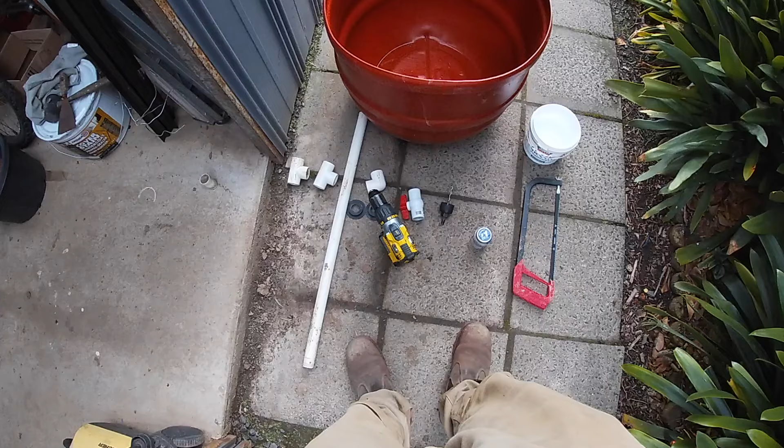To create this filter, all you'll need is a good watertight container. Here I'm using half an old olive barrel. Those of you that follow my channel will know these barrels make many appearances. That's because they're cheap, strong, food safe, UV stabilized and easy to find on Marketplace, eBay, those sorts of sites.

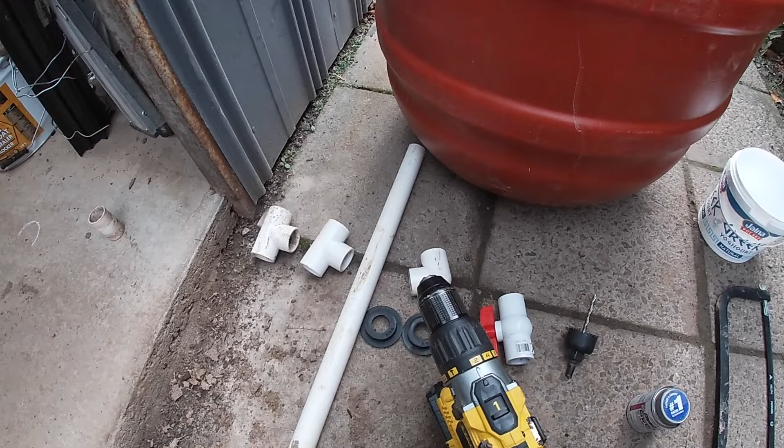For the plumbing, I'll be using 2 T-piece fittings, 2 uni seals, some PVC pressure pipe, a couple of elbow fittings, 1 ball valve to provide an easy way to flush out the filter. The size of the plumbing fittings will be determined by the size of the pump you are using. For this quick setup, I'll be using a pump capable of delivering 1,000 litres per hour. Therefore, I'm using 25mm or 1-inch plumbing fittings.

You'll probably find that you'll need other fittings to create a more aesthetically pleasing filter. I'm just quickly knocking this one up to show you guys, and this is all I'm going to need to make it functional. So for the tools, you'll need a drill and a hole saw to create holes for the uni seals. For these 25mm uni seals, I'm using a 44mm hole saw.

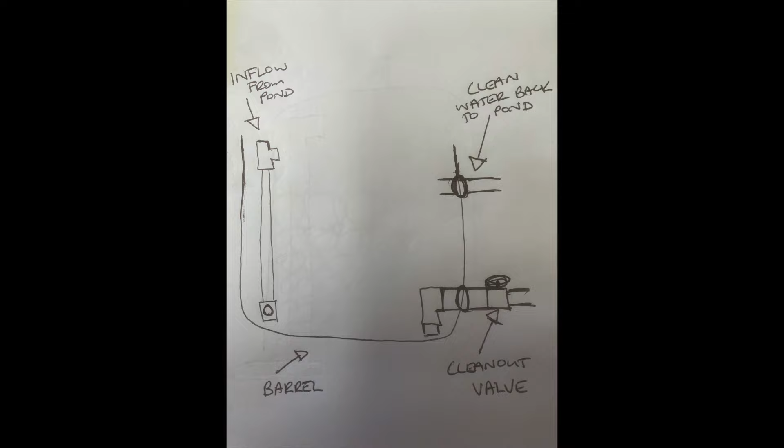The inflow from the pump can come over the barrel as it's being pumped in. Both the outflow and the clean out are using gravity, hence the need for a watertight seal. Of course, if you wanted to make it easier to conceal the inflow piping, you could add a 3rd uni seal. I find it unnecessary, as once I add the rocks and gravel, the inflow pipe is quite hidden.

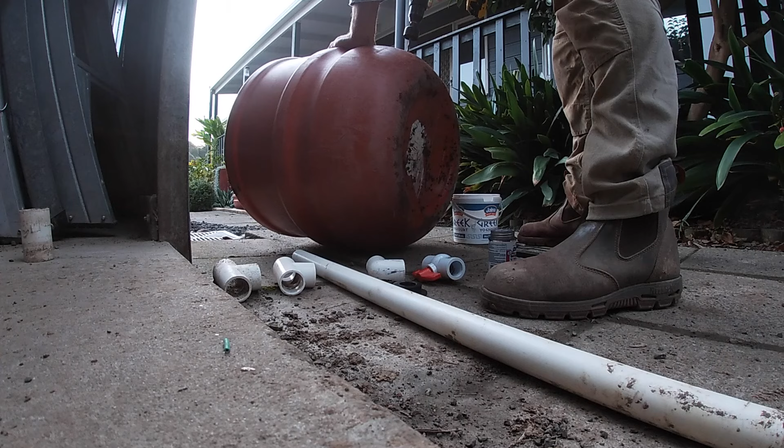When drilling the hole for the uni seal, I find if I put the drill in reverse, I get a much smoother hole. Once the holes are in, the fun begins. This is where the soapy water helps to get the pipe in, and you can cheat like me if you want and bash it in with a rubber mallet. Now that the tricky part's done, we can go ahead and add the valve to that clean out pipe.

You'll notice that the clean out pipe isn't sitting right on the bottom of the barrel. I find it too difficult to drill the hole at the very base and fit the uni seal, so I've drilled it a few inches above the base.

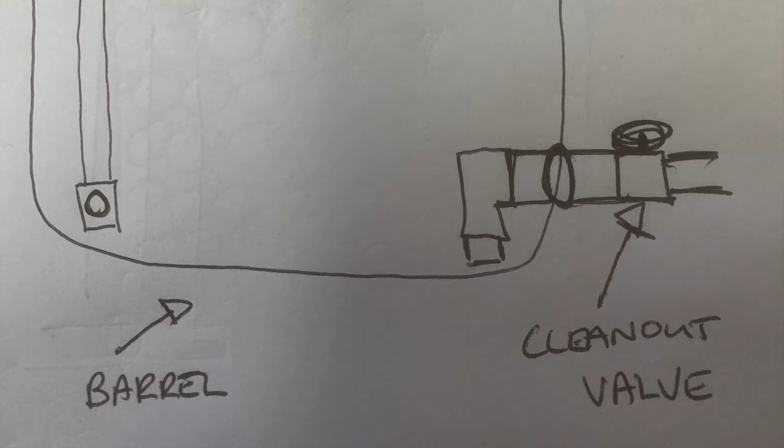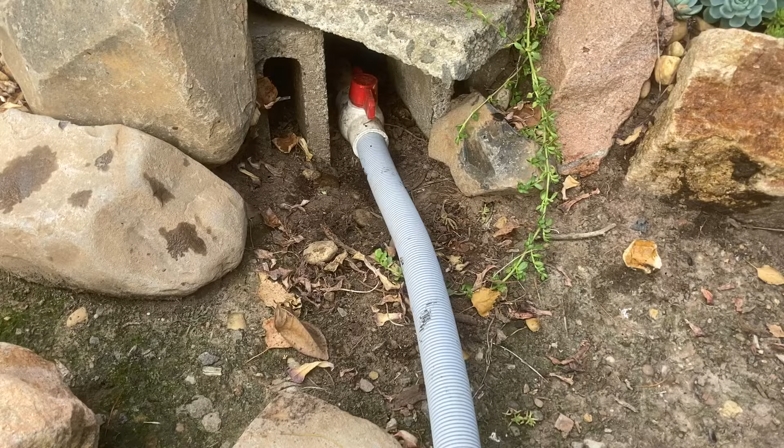To fix this, I added an elbow fitting with a small piece of pipe attached that almost touches the bottom of the barrel. So then once I attach a hose to the clean out valve and the hose flows downhill, this creates a siphon that will completely drain the filter right down to the bottom. And as the filter drains, it'll pull all that accumulated solid matter out from the filter.

The last piece of plumbing is the pipe for the inflow. These filters are upflow bogs, so the water is discharged in the bottom of the filter and then it slowly fills up. That's what allows the solid materials to settle on the bottom of the filter while the clean water rises to the top and returns to the pond.

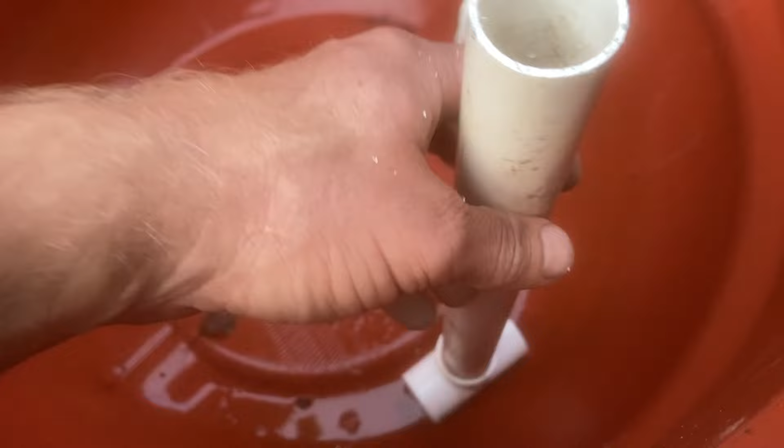This is simply a vertical pipe with a T-piece at the bottom and a T-piece at the top. The bottom one is going to help disperse water through the base of the filter, and the one on the top allows air into the pipe, should the pump stop.

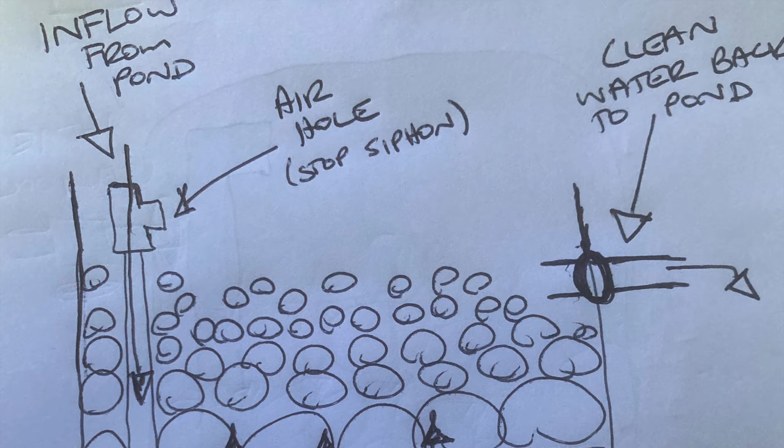The T-piece on the top is quite important as it prevents the water from draining out of the filter should the pump stop. If this was an elbow fitting, the water in the filter would siphon out of this pump input pipe back out through the pump. This is because the water level in the filter is higher than the water level in the pond. So by adding the T-fitting, air gets into the pipe and that will break the siphon should the pump stop.

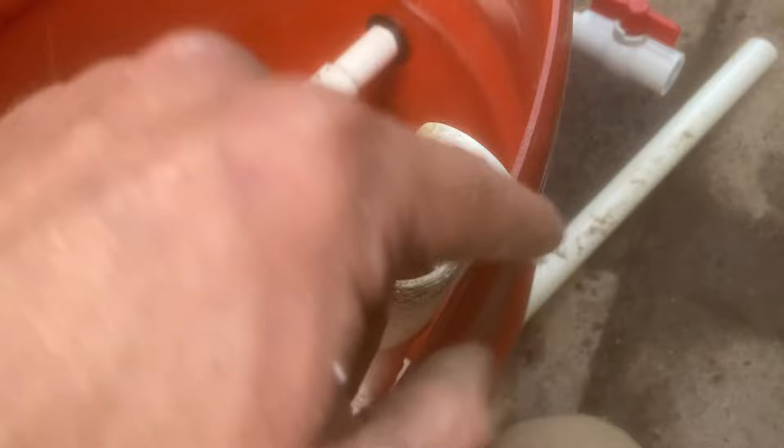I also recommend you add a reducer to that air hole so that the majority of the water from the pump is directed into the bottom of the filter. Over time, as the filter starts to get clogged and is in need of a clean out, the water might try and escape out that air hole. We want to send as much water to the base of the filter and up through all the rocks and gravel as possible. So now it starts getting fun.

We can add rocks and gravel to the filter. These are most important as they are going to become home to the nitrifying bacteria that will keep the pond safe for the fish and also maintain that crystal clear water we are all looking to achieve.

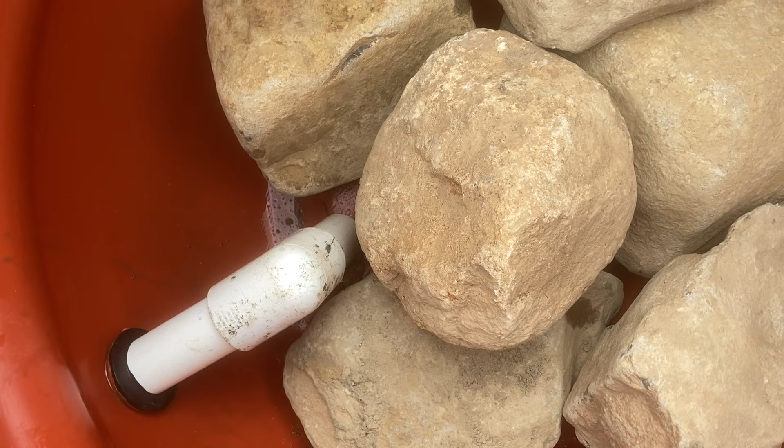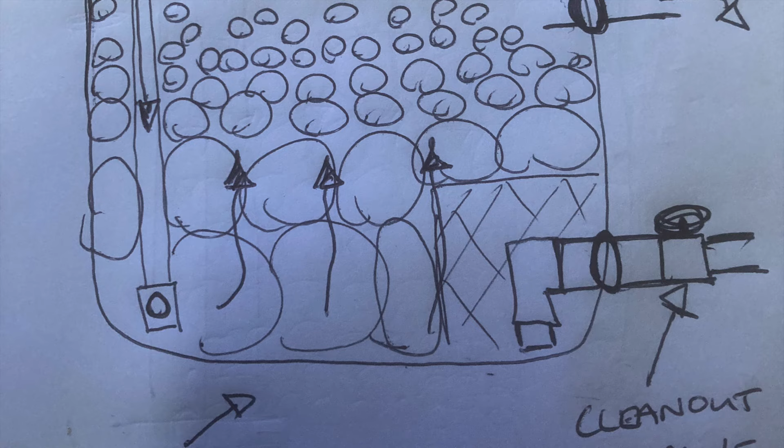You want to use quite large rocks on the bottom of the filter to create plenty of void areas where solid materials can accumulate. You also might like to create a false bottom with a milk crate or an old bucket with nice big holes. Anything really that can support the weight of the rock and the pebble. A false bottom is especially useful around the clean-out pipe to prevent it becoming blocked.

As you add the layers of rock, you want to start big and get smaller and smaller as you get closer to the top. Here I'm using 20mm river pebbles to finish off the top layer. I should have mentioned before filling with the rocks and pebbles, give the filter a test to make sure everything is watertight. You can get creative with how you want to dress up the filter.

One thing you want to add is some plants into the filter. These are going to help remove nutrients from the water. Choose something with a shallow root system so it doesn't clog the filter and it's easy to clean out. One of my favourites is Bacopa.

So that's the basics of how to make one. Now let's talk a little bit about how big it needs to be, what sort of water volume we want moving through the filter, and how to conceal it, and also how to clean it.

When it comes to the size of the filter, the safe bet is to make it at least 10% of the pond size. This pond was easy as it was a more formal styled pond with a consistent depth. The pond holds 1,000 litres, so the filter was exactly the size of the one we just built. The half olive barrel holds just over 100 litres, so the perfect size.

Don't think these filters are just for small ponds. These style of filters can be scaled to any size. You can get creative with the containers you use. In fact, you don't even need to use containers at all. The filters I'm building on my dream pond are using pond liner, so I could go nice and big.

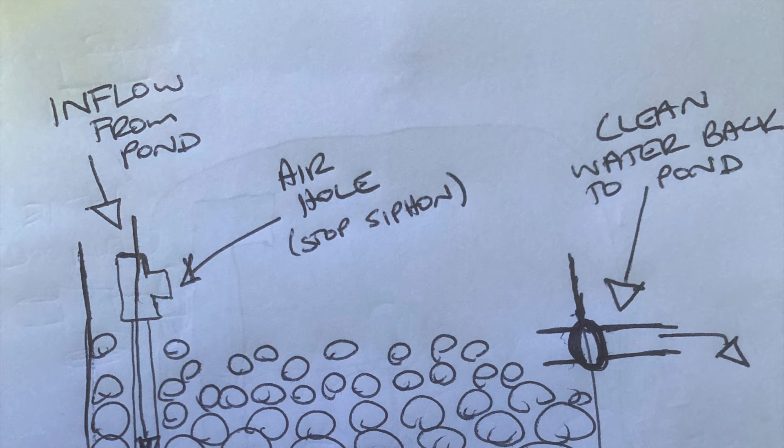I've found that if it takes the water 5 to 15 minutes to pass through the filter, that has worked great. A good way to be able to regulate the flow is adding a valve to the T-piece that prevents the siphon if the pump is turned off. Alternatively, we can size the pump according to the filter we wish to create.

I like to use this pond as an example because I know it holds exactly 1,000 litres, so it makes the maths easy. So let's say the pump moves 600 litres per hour, so 100 litres every 10 minutes. So that's within my 5 to 15 minute guideline. Of course, quite a bit of the water holding capacity within the filter has been displaced. So if you halve the 600 litres an hour to 300 litres an hour, that would be about perfect. And I'm pretty sure that the pump on this pond moves 350 litres per hour, so pretty bloody close.

Now with all that said, another thing about these filters is that they're really forgiving. You can move more water through them or less and still end up with fantastic results. Try not to get too bogged down in the finer points. I don't want to confuse you. Remember, two of the main goals are to provide a home for nitrifying bacteria, that's the rocks and the pebbles, and allow solid materials to be removed. So while slowing the water will help that, so too do the roots of the plants inside the filter.

Now let's talk about disguising the filter. I know I much prefer not seeing it. The filter in this pond is up in the top left-hand corner behind the trachelospermum. The easiest way to hide the filter is during the construction. Here I used a lot of the dirt from the pond to mound up a berm.

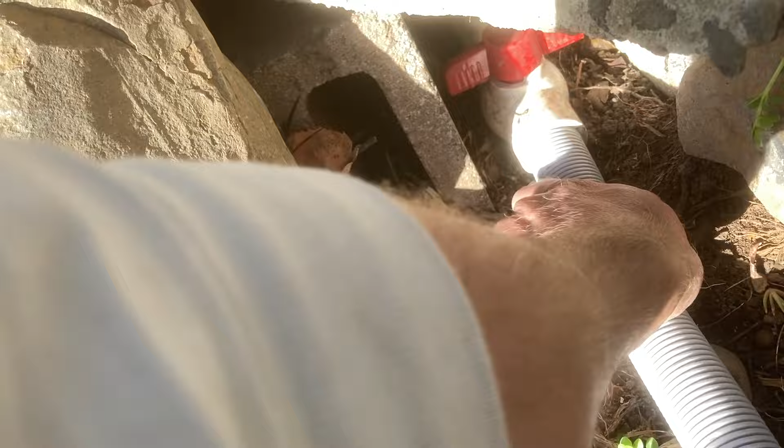The last thing I want to talk about is the cleaning. Because of the valve we added, this is really easy and doesn't take long at all. First we connect a hose to the clean out pipe and run it into a lower point in the garden. Keep the pump running and move the water all over the surface of the filter.

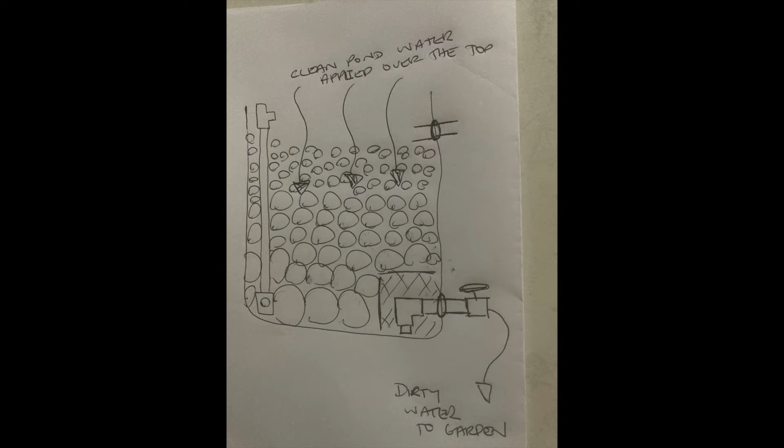Now that the water is being directed down, any muck that has made its way to the middle of the filter is being driven down to where the larger voids are. With the clean out valve open, all that muck is free to flow out and fertilise the garden. Well, that's about it for this video.